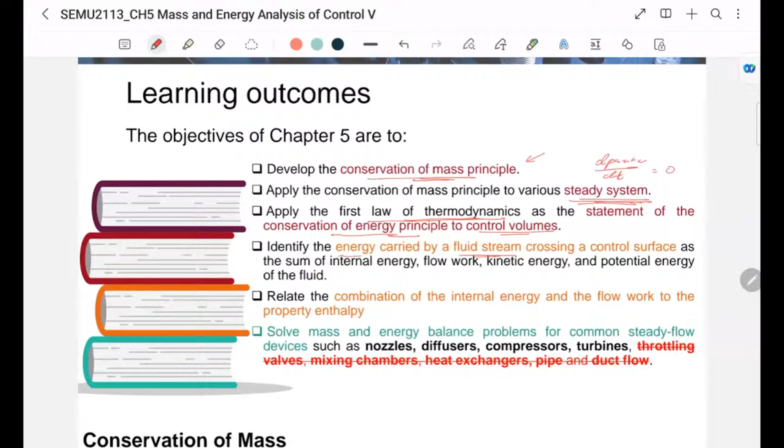And then we'll identify the energy, of course, because chapters 3, 4, 5 are all about energy. So we're looking at the energy carried by the fluid stream across the control surface. When the mass goes in, how do we define the energy carried by the fluid? When the fluid goes out, how do we define the energy brought out by the fluid itself? If you still remember the full equation that we were using in chapter 4, we basically write it as Q in minus Q out plus work in minus work out plus E mass in minus E mass out. This whole thing equals the change in the internal energy plus kinetic energy plus potential energy.

If our system is not moving, the whole control volume is not moving, there's no change in velocity, then kinetic energy is 0. If there's no change in elevation, the potential energy is also equal to 0. And in a closed system, the energy due to the mass exchange is also 0 because in a closed system there's no mass exchange. But in today's open system, this will not be 0. So we need to know how to define the energy carried by the mass of the fluid itself. So that's what it means by the energy carried by the fluid.

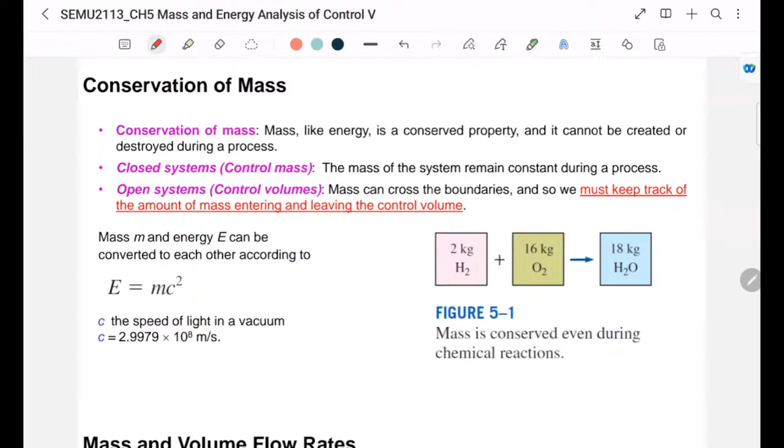Okay, so first of all, let's look at the conservation of mass. Conservation of mass is quite simple to understand. Let's look at this example here. When you have 2 kg of hydrogen plus 16 kg of oxygen, at the end of the day, when the two mix together, you get H2O. So eventually you get 18 kilograms. So the mass is always conserved.

You can't destroy the mass. If it's in your control volume, it's there. You take it out, then it must become less. If you add more in, it becomes more. Okay, so the mass is always balanced. In a way, it's almost like the equilibrium chemical equation that you write in your chemistry class. So the mass is always conserved.

Okay, and mass and energy, as some of you probably know, are interchangeable according to this equation here. We won't go into too much detail, but because they behave similarly, they can convert into one another. So therefore, when energy is conserved, mass must be conserved as well. It's as simple as that. Otherwise, where would the mass have gone, right?

And in the closed system, as we said earlier, we call it the control mass system, basically. The mass in the system remains constant throughout the process. But for an open system, only the volume is controlled, only the volume is constant. Mass is not, because mass can come in and out. So we must always keep track of the amount of mass entering and leaving the volume.

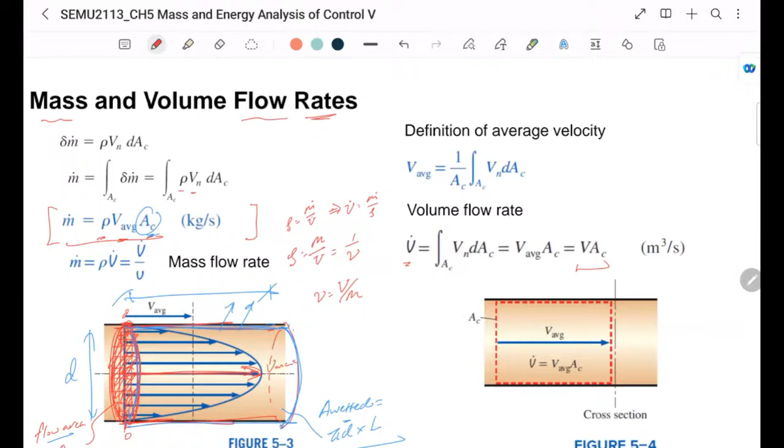So volume flow rate is basically how fast this volume of air is moving inside the pipe. It's in meter cubed per second, while mass flow rate is in kilogram per second. So that's how we calculate the mass flow rate and the volume flow rate.

But if you open the drain, this will not be 0. If they are equal, which means you add the water as fast as the water flows out, then the water level will stay constant. But if you close the water and only open the drain, then the water level will decrease. So that's what conservation of mass basically means.

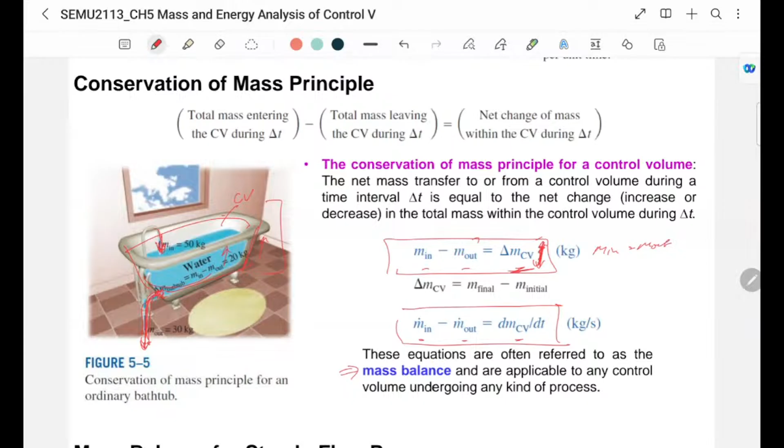Then we talk about the steady flow process or steady flow system. Steady flow basically means d of the parameter over dt equals 0, and the parameter can be any parameter. In this case, it can be the mass, which means for a steady flow system, dm control volume over dt must be equal to 0.

That's how we define a steady flow system. dP over dt must be 0, no pressure change. dT over dt must be 0 as well. In fact, dE over dt must be 0 as well. So there's no change in the pressure, temperature, energy in the control volume, everything in the control volume. No change in the mass. Only then, over time, can we call it a steady flow system.

The example just now, if you close the drain, you don't let the flow go out, there is a delta m in the control volume over time. So therefore, that is not a steady system. If you close the water tap and open the drain, there is also a dm in the control volume over time. So therefore, it's not a steady system as well.

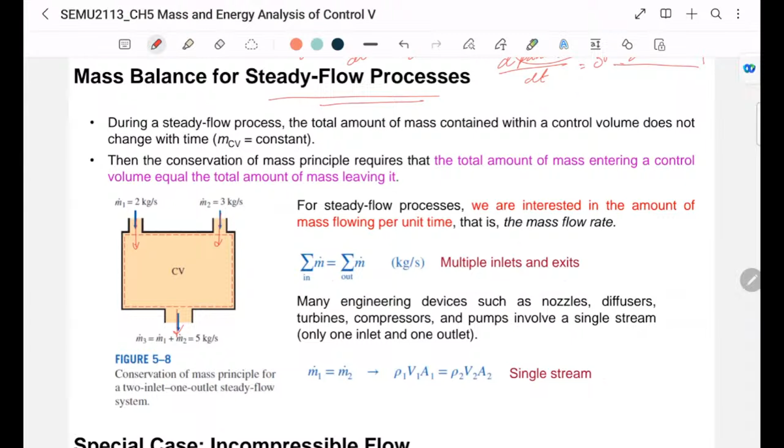So in a steady flow system, for instance, if here goes in 2 kilograms per second, here 3 kilograms per second, then the one going out must be the sum of them, which is 5. Only then can dm_CV over dt be equal to 0. So in this kind of system, if it's a single stream, one in, one out, m-dot 1, the mass flow rate coming in, equals m-dot 2. If we write 1 for this, then m1 plus m2 equals m3. This is conservation of mass for this system.

And individually, m-dot 1 equals rho V A at inlet number 1. Sorry, I have to draw this system like this. So this is m-dot 1, this is m-dot 2. The mass flow here is rho 1, A1, V1. Here will be rho 2, A2, V2. So if it's a steady flow system, then these must be equal, because then dm over dt in the control volume is 0. For multiple inlets and exits, the sum of all the inlets equals the sum of all the outlets. If there's a fourth one here going out, then you must add m4.

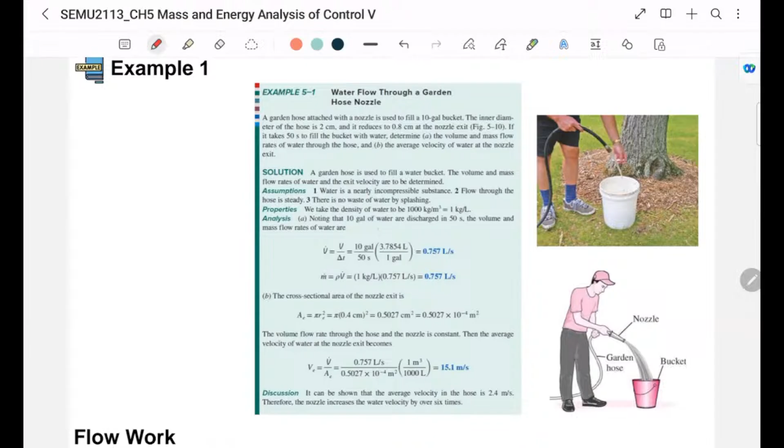So let's look at one example. It says that a garden hose is attached to a nozzle. I think everyone has played with this before. We use it to fill a 10-gallon bucket. The inner diameter of the hose is 2 centimeters, and it reduces to 0.8 centimeters at the nozzle exit. If it takes 50 seconds to fill the bucket with water, determine two things. One is the volume and mass flow rate of the water through the hose itself, not the nozzle. And second, the average velocity of water at the nozzle exit.

Okay, so to put it simple, you can imagine like this. This is a nozzle. Okay, so this here diameter is 2 cm, and here the outlet D2 is 0.8 cm.

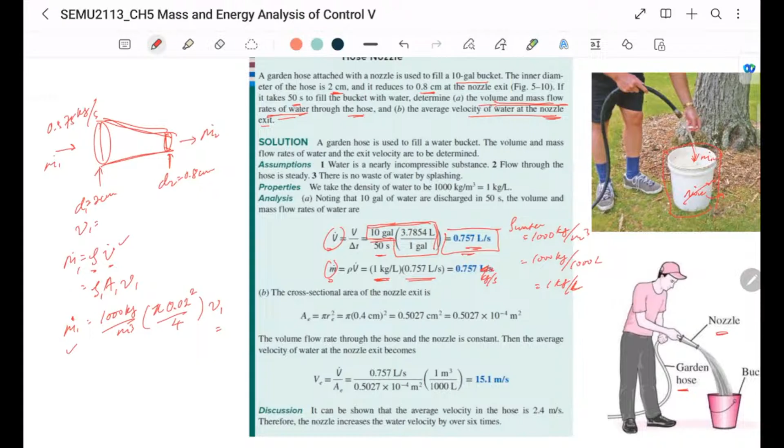There is no mass out. So the bucket itself, if our control volume is the bucket, then it's not a constant, it's not a steady system. Okay, but for the hose, yes. Mass in equal to mass out.

We look at across the nozzle, which is what I'm drawing here. Okay, so this is the dm control volume over dt is 0. The water from the hose come in, it goes out from the nozzle right away. Okay, so which means M1 equal to M2, M dot, same thing.

Okay, now we're talking about the rate. So then M2 is equal to rho 2 A2 V2. Density remain the same. Area, now pi, the diameter for the nozzle is 0.8 centimeter, so therefore 0.008 square over 4, times V2. Okay, so then you'll be able to find out how much is V2, which should be this.

So really when you analyze a system, it's quite important for you to look at where is your control volume, where is the boundary that you are analyzing. Okay, so here the focus is actually the nozzle. Okay, if we are looking at the bucket itself,

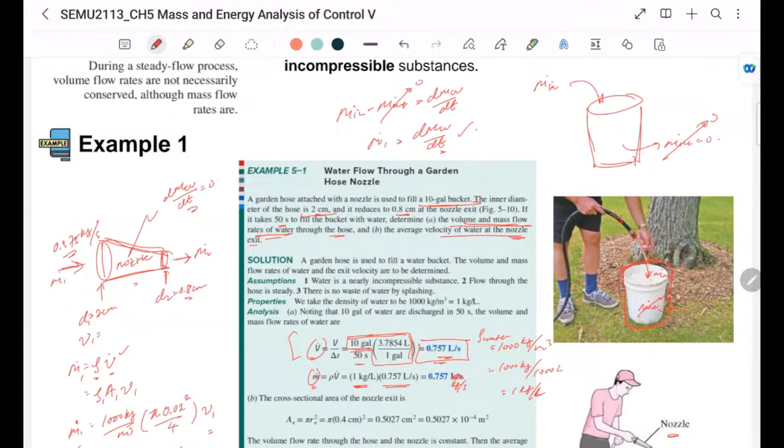Okay, so for the tank itself, it's not a steady system. There is a change in the mass. Okay, but across the nozzle, there's none. Okay, so that's what this example is trying to show you.

Okay, so far, can you understand this example? Okay, good. Right then, so let's look at the work from the flow.

Okay, so now we know how to find the flow rate, how to apply the conservation of mass. So next, let's look at how we evaluate the energy, the work done by the flow. Okay, so it's just flow moving. So how come there's any work?

There's a question asking, is 1 gallon equal to 3.78541 liters a fixed number? Yes, that's an imperial unit to SI unit conversion, and it's fixed. It's like 1 inch to centimeter.

But don't worry, all your questions in the test, in your assignment, everything will be in SI unit. You don't have to remember imperial unit conversion, and it shouldn't appear. Our syllabus is all SI unit. It just happened that this textbook uses imperial unit.

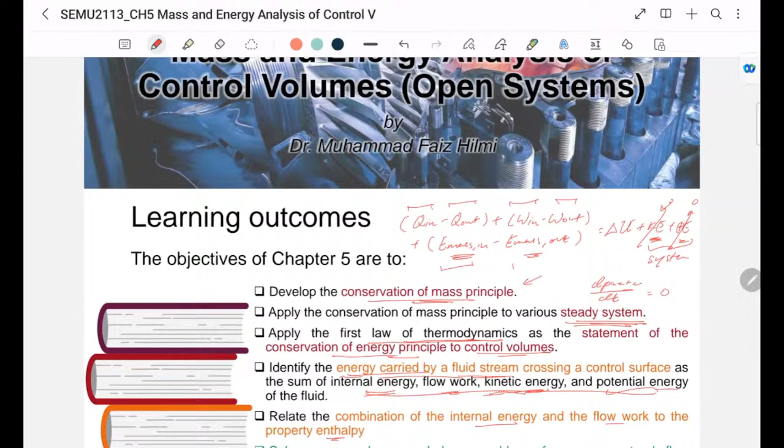It's always in minus out, in minus out. Same goes here, in minus out as well. Okay, so that's basically what flow work is, or flow energy, sometimes we call it.

Okay, but this energy is really in terms of work, because it doesn't involve a change in temperature. It's not heat for sure, so therefore it's a work.

But that is not the total energy of a flowing fluid. The total energy in the flowing fluid, we call it E.

Total energy is equal to the internal energy of the fluid itself, plus kinetic energy—U is internal energy—plus kinetic energy of the fluid, plus potential energy of the fluid. The fluid is moving.

Okay, not the system kinetic energy—the system is stationary, the control volume is stationary. It's not moving, and it's not changing elevation as well. Now we're talking about just the fluid itself.

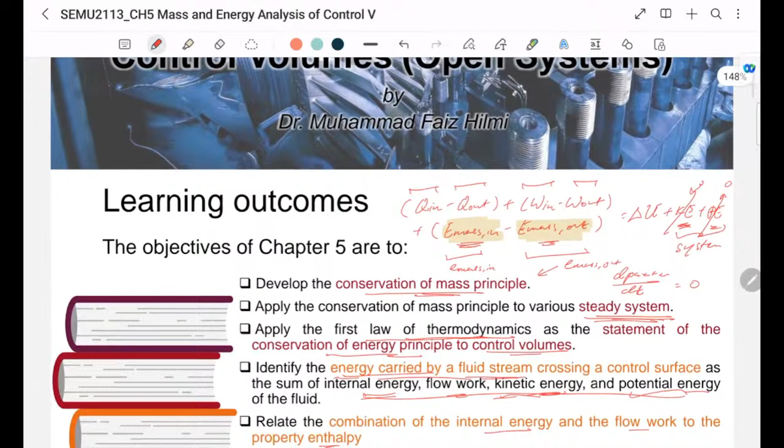Which E? Let's go back to here—this E and this E. Of course here is the absolute term. What we see just now is the E mass in, this is E mass out. Over mass, it becomes the small capital.

So then if we look at non-flowing system, which is closed system, and flowing system—for flowing system, theta equal to PV plus U plus KE plus potential energy, so then we make it into this. Whereas for non-flowing system, which is closed system, PV plus U plus KE plus PE.

PV is 0 because for non-moving flow, there is no flow work at all. So then it becomes U plus kinetic energy plus potential energy. So for non-flowing fluid, we definitely write as E, but just to differentiate it, here we write as theta.

But it's literally the E basically—it's really the same E that we're talking about, which is what you can see here. The E mass is really m multiplied with theta. If we multiply with m dot, which is the flow rate, mass is just kg. If we're talking about kg per second, which means time comes into picture, then we get the E dot mass.

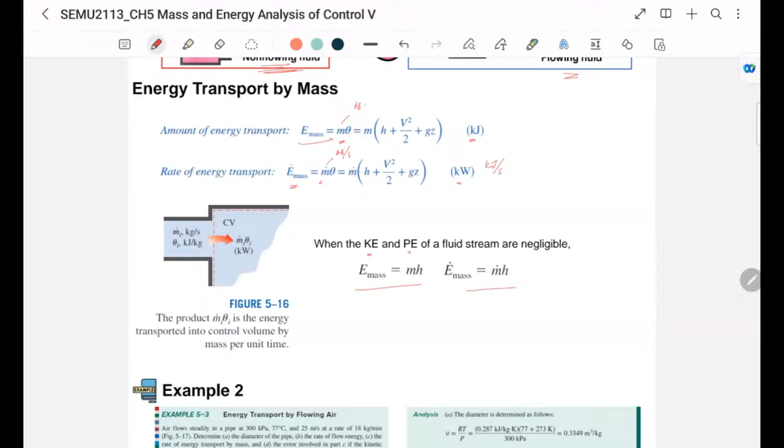And this is applicable to both ideal and non-ideal gas, which means for all the pure substances that we're talking about. Because it's applied to pure substance, to get the H we have to refer to the property table.

Unless if it's ideal gas, then we can use the ideal gas equation—that's a special case. Otherwise, all the time we have to refer to the property table to get the property, the enthalpy, basically.

Okay, so let's look at one example then—another example concerning this. It says that air flows steadily in a pipe at this pressure, this temperature, this velocity: 300 kilopascal, 77 degrees Celsius, and 25 meter per second. Maybe I should just write it properly.

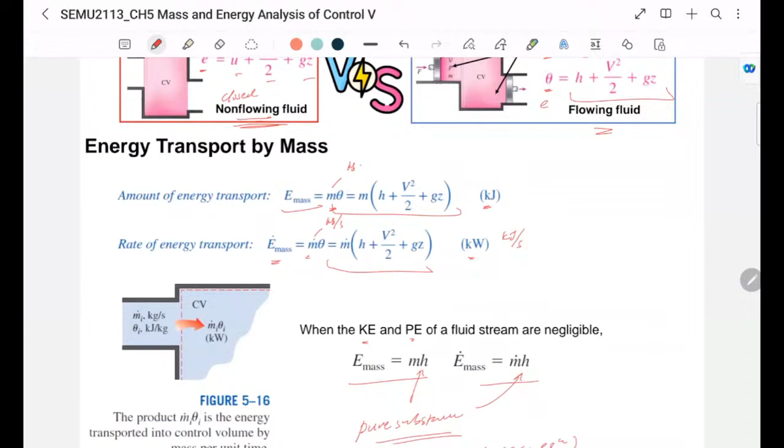Okay. And then last, the error involved in part C, which is this one, if kinetic energy is being neglected. Okay, because we know this E dot should be equal to this full equation. Okay, so it should be M dot times H plus V squared over 2 plus gZ. Okay, but part D wants us to ignore this. Then see what will happen.

Okay, so one by one, let's start by finding the area. Okay. So the solution is here as well. Okay, but I myself probably will do it slightly different. Okay, so for me, M1 equal to 18 kilogram per minute over 60, kilogram per second. Okay, I always like to change to SI unit first, so I don't get confused.

Okay, so this equal to rho 1 A1 V1. Okay, and this is air. Okay, so because air is ideal gas, the density I can calculate for state 1 as P over RT. Okay, because for ideal gas, PV equal to MRT. Okay, so then mass over volume is P over RT, basically. It's ideal gas. It's air. Okay, that's very important. You have to know what is your working fluid, and then what kind of assumption you can apply to it. Okay.

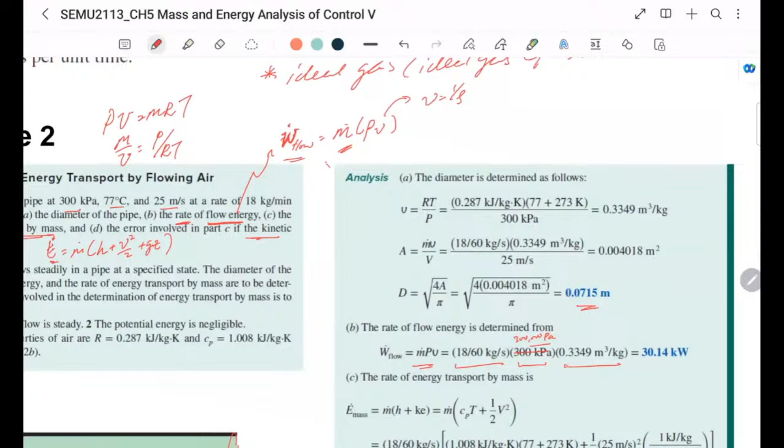Okay. Second is the flow energy. Okay, so for flow, we know that is basically m dot multiplied with Pv. Okay, because of this equation. Okay, so then you can see here the solution, m multiplied with P over density, which you already calculated just now. Okay, so from there you'll be able to find out the rate of the flow energy. Okay, so that's how we find out the flow energy.

And last is the total energy transport by the mass. So then we write the full equation here. Okay, of course there's a plus PE as well, but then potential energy, since there's no change in the elevation in the flow, is basically 0. Okay, and then here the enthalpy, instead of looking from thermodynamic table, because it's ideal gas,

H can be approximated to Cp multiplied with T. Cp is the constant pressure specific heat. T is the temperature. So then if you calculate everything, you should get this number. So that is the total energy transport by the mass. Okay. Flow energy plus internal energy plus potential energy plus kinetic energy. Okay. Internal energy plus the flow energy, of course, equal to the enthalpy. So that's how we evaluate it.

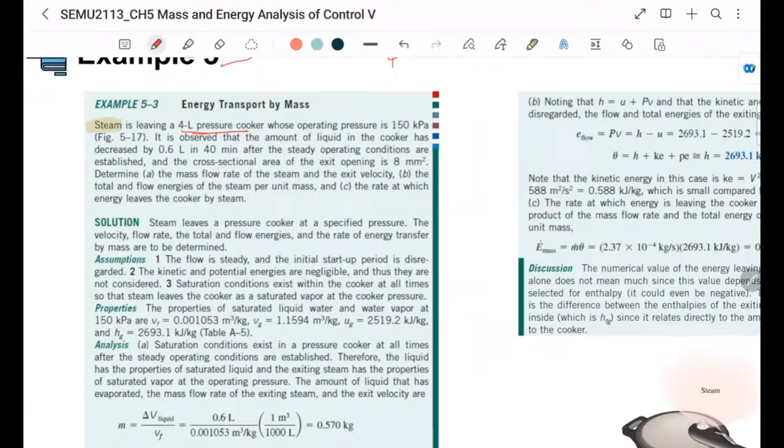Okay. So here it says that steam is leaving a 4-liter pressure cooker. Operating pressure 150 kilopascal, which means inside here is 150 kilopascal. It is observed that the amount of liquid in the cooker has decreased by 0.6 liter in 40 minutes. So then that gives us the volume flow rate basically, after the steady operating conditions are established. So this is under steady state condition. So then the volume flow rate is 0.6 liter over 40 minutes.

And the cross-section area of the opening is 8 millimeter square, so cross-section area is available. So what is the mass flow rate of the steam and the exit velocity? That's what the question wants us to find out first. Second, the total and the flow energy of the steam per unit mass. Which means the question wants us to find out the E and the flow energy, which is the W flow. Total energy I'll just write as E, or earlier they write as theta.

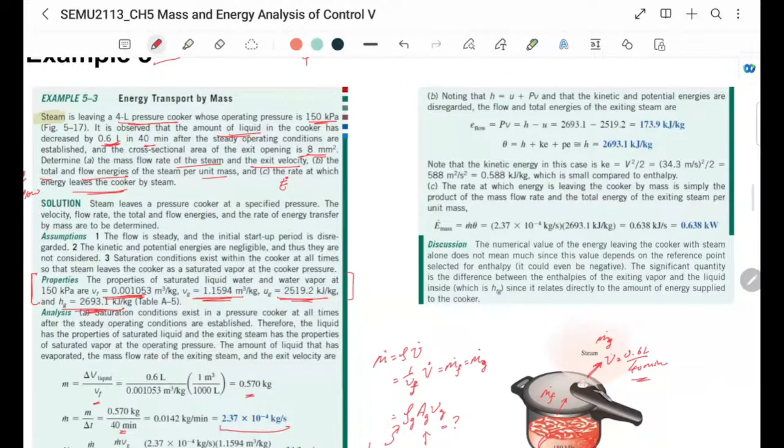Then is the total and the flow energy. Maybe let's find the flow energy first. Oops, it's not written here. So the flow energy is actually equal to PV. And we also know that H equals the flow energy plus internal energy U. So to get this, it's basically H minus U. And the one that goes out is the gas, so we use the property of the gas. From the thermodynamic table, we have Hg and Ug, the saturated vapor, which gives us this.

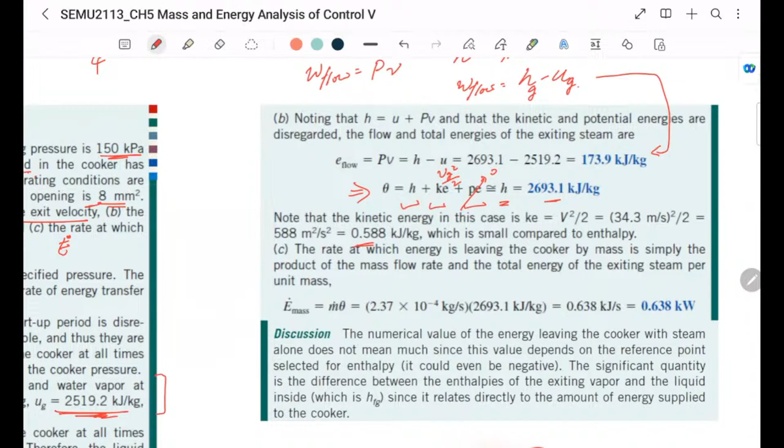And then the total energy, theta, is defined as H plus kinetic energy plus potential energy. Kinetic energy is close to zero, as we know, so we can approximate it equal to H. Potential energy is definitely zero. Or we can include kinetic energy as well, it's not a problem, we already have this. So this can be V squared over 2, and you get an additional 0.588 to this. For me, I will just include that, since it's always enthalpy plus kinetic energy plus potential energy.

And then the rate at which energy leaves the steam cooker is basically this theta multiplied by the flow rate that we calculated earlier. Then we get the actual kilowatts of energy, the rate of energy leaving this pressure cooker through the steam. So that's how we can solve the question. It's all about finding the state, basically.

How do we find the state? Then we'll be able to calculate the parameter. Okay. Right then. Any question up until this point? Is everyone still following me?

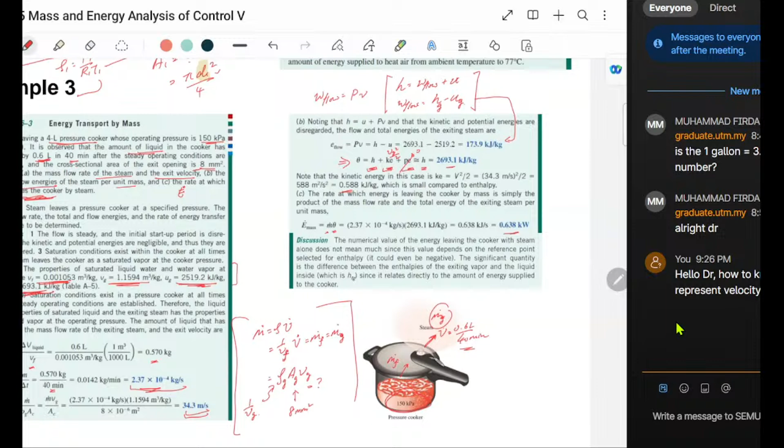How to know V represents velocity or volume? That's a very good question. I would say, yep, I think throughout the notes here, if it's velocity it is this writing of V, okay? Whereas for volume it is this, yes, this curvy V.

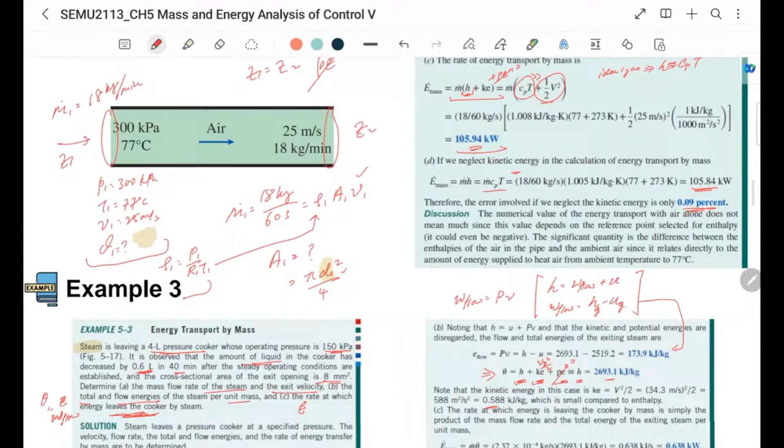So this is volume, this is velocity. Yes, it's a bit difficult to differentiate, I agree. And there is no specific velocity. There's nothing so-called specific velocity. So therefore, you don't have a small cap velocity. So all these curvy V are standing for volume, specific volume. The small cap curvy V, specific volume.

The large curvy V is the total volume, without the serif. It's the sans serif font. Is that okay? Well, a lot of time in thermodynamics especially, we're running out of symbols to represent things. Sometimes we do use U to represent velocity as well, but in this case we can't because internal energy is using U already.

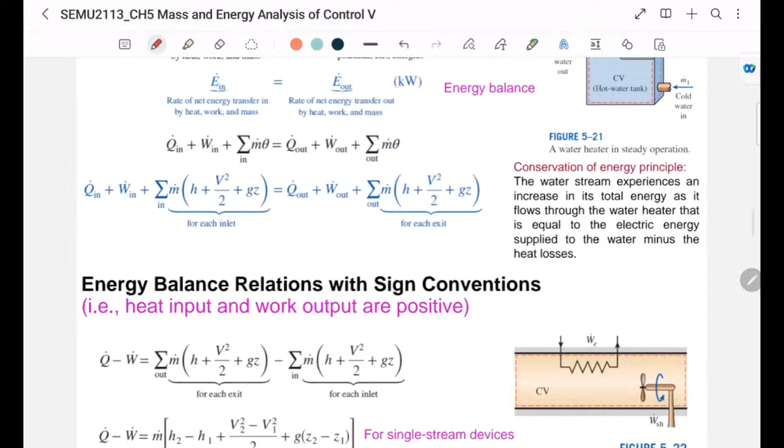So yeah, the volume is the curvy sans serif V, whereas the velocity is a serif V, the straight V. Okay. Right then. So let's look at how we analyze steady flow systems then. Steady flow open system.

So we looked at how we define energy already. The work, the flow energy, the flow work basically, and then the total energy in the flowing fluid. So we looked at conservation of mass and how we define the energy of it. So then let's apply that to a steady flow system. In a steady flow system, basically volume is constant, mass is constant, energy is also constant. So conservation of energy and conservation of mass have to be applied.

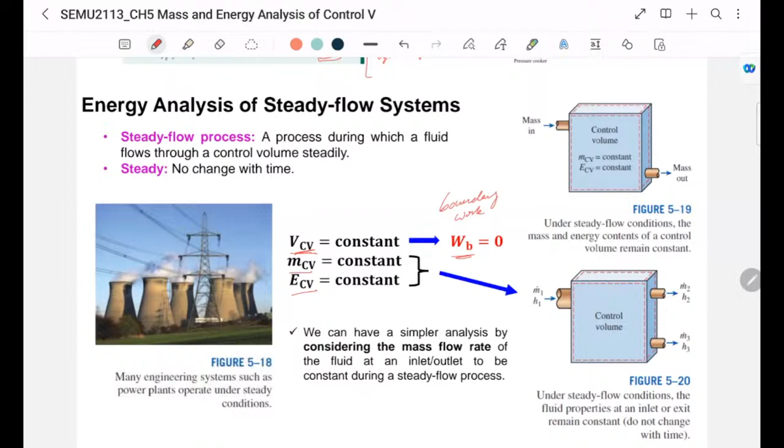And the fact that volume is constant means that boundary work is also zero. Boundary work is the expansion of the boundary, the work done by the boundary itself. Since now the boundary doesn't expand, volume is constant, so boundary work will be zero, unlike the closed system that we learned before. So here there's no boundary work, but then we have a flow work. Steady again means no change in time basically.

So then the equation that we are applying here is pretty simple. I'll just write the E mass as E, so it's a bit shorter. Right, and then because this is the system potential energy and system kinetic energy, as long as the system is not moving and there's no elevation change, velocity 0, elevation change 0, so then we have this to be 0.

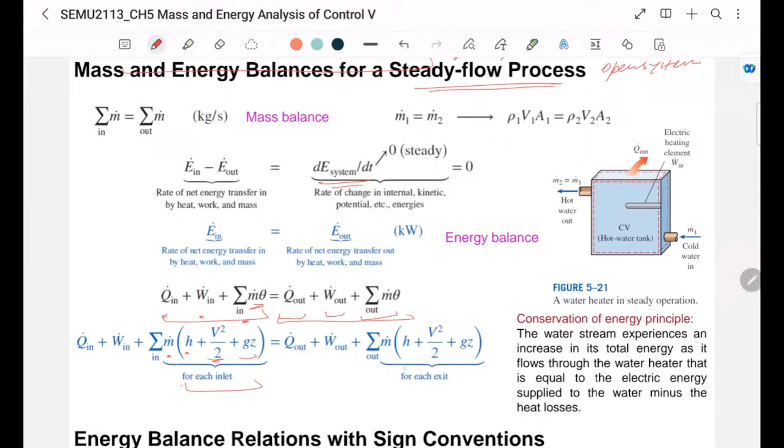Steady flow open system. This is the equation that we'll be using. And m dot theta, so m dot multiplied with enthalpy plus kinetic energy of the fluid, not the system, the fluid itself, plus the potential energy of the fluid. Same goes for this side. So this is what we were looking at just now, how to define the energy in the flow. Now we apply it here. So the whole thing is still based on the equation that you've seen in chapter 4, basically.

And sign convention, well, I think the easiest is if the work goes in, energy goes in, then it's positive. If they go out, it's negative. I think that's much easier to remember. Okay. And of course, everything can be expressed in specific terms as well. It's not a problem.

If we divide over mass flow, depending if we are talking about the rate of energy transfer, we divide it by mass flow rate, then we get the specific heat. If you're talking about the power, rate of work transfer, divide by the mass flow rate, then we'll get the specific work, basically. So this equation really can be in the absolute terms or in the specific terms.

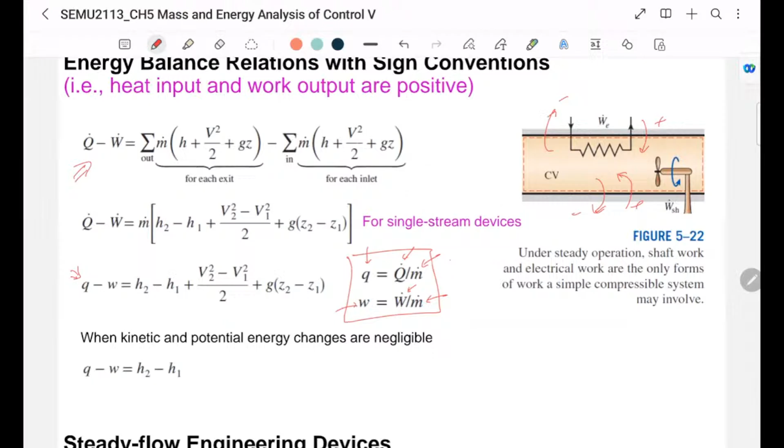So let's look at a few steady flow devices then.

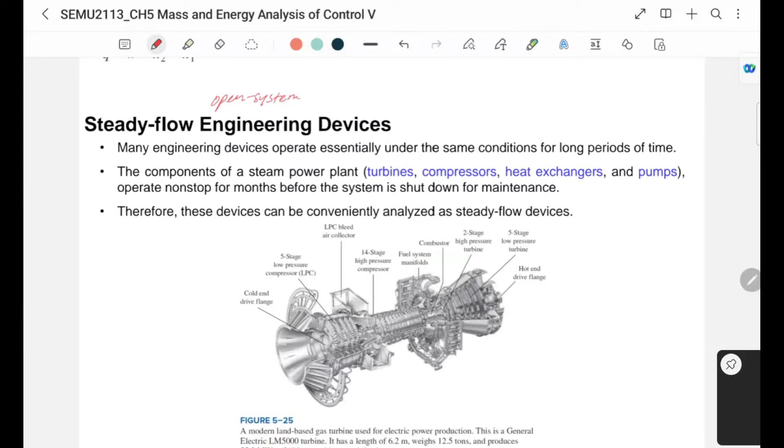So next, let's look at how we can apply what we learned just now to some of the steady flow engineering devices, open systems specifically, where there's a mass exchange. And we'll be looking at a few examples: nozzle, diffuser, turbine, and compressor. There are more examples such as heat exchanger and pump, but we won't go into every single one of them, mainly because of the time constraint. So we'll look at the general concept, and then you should be able to apply it to the rest of them.

So just remember, all these devices, all these systems, we analyze under steady flow. Which means the change of mass in the control volume over time is always zero. So in a way, there's no mass accumulation in this kind of system when we analyze them.

So first of all, nozzle and diffuser. Nozzle, we've seen the example before. It changes the velocity. Across this device, this control volume, the properties will change. Specifically, a nozzle increases the velocity. So when velocity increases, pressure drops. So sometimes when engineers need to speed up the flow, we'll use a nozzle. We change the area. This is A1. This is A2. So by changing the area, we can manipulate the velocity, we can manipulate the pressure.

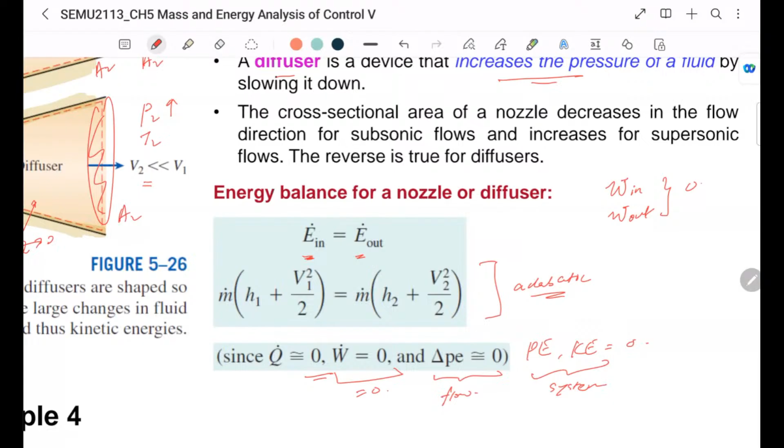This here, the small cap one, they are referring to the flow. So the change in the flow kinetic energy, there is, but then change in the potential energy in the flow is zero as well.

So quickly, let's look at one example. So this is a diffuser in the aircraft engine. So diffuser and nozzle is quite commonly used. In fact, it's being used in the aircraft engine, the same aircraft that everyone takes when we go travel.

So it says that air at 10 degrees Celsius and 80 kilopascal enters a diffuser of a jet steadily with a velocity of 200 meter per second. Inlet area. So it's a diffuser, so I should just draw like this. 10 degrees Celsius, 80 kilopascal. Velocity is 200 meter per second. The flow goes in. Inlet area 0.4 meter square.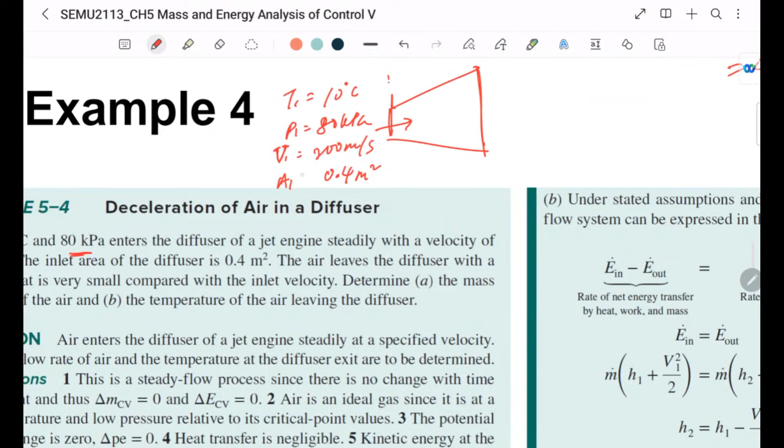I should write this properly. V1. Straight V. And then A1. The air leaves the diffuser with a velocity that is very small compared to the inlet velocity. So going out here, V2 is almost zero. That's what the question says. So determine the mass flow rate of the air and the temperature of the air leaving the diffuser.

So the mass flow rate we can analyze from the inlet because the inlet has most of the properties that we need. It's rho 1, A1, V1. V1 we know, A1 we know. Rho is basically P1 over RT because this is air. It's an ideal gas, so therefore we can apply the ideal gas equation for it. So that's how we can find out the mass flow rate at the inlet of the diffuser. And this is our control boundary, by the way.

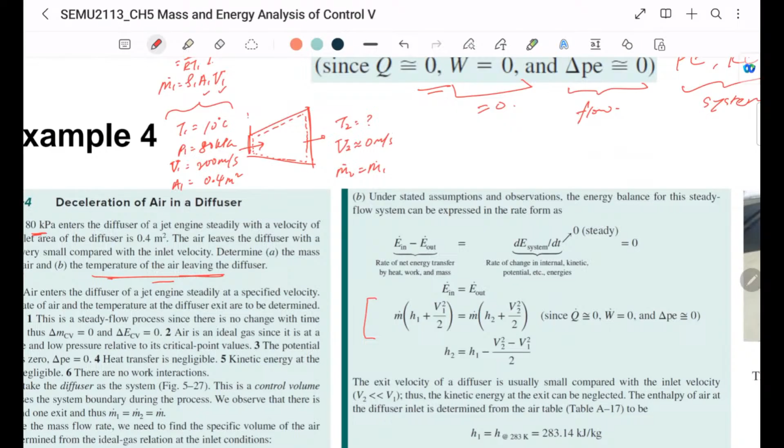Then how can we find out the temperature leaving the diffuser? This is a steady flow device, so therefore M2 has to be equal to M1. And then we have to write the energy equation, which looks like this. And here, there is no heat transfer involved, not being mentioned. For a diffuser, definitely the work transfer is 0 as well. So therefore, we come to this equation here.

So H1 we can calculate based on CP T1. And H2, obviously, we can calculate based on CP T2, which T2 we don't know, T1 we know. Velocity 1 we know. Velocity 2, the question says is very small, almost 0, so we can treat it as 0. So we rearrange the whole thing. Here, the mass got cancelled out. Even if it doesn't cancel out, you know the number, so we can just plug it in. So then eventually, you will get T2, which is about this temperature.

So that's how we can solve a problem for a diffuser. If it's a nozzle, pretty much the same way as well. So you can see the pattern is always you find out the state at one side first, and then you relate the second state using the energy balance equation. Most of the time, that's how we solve an open system. Even the closed system, pretty much the same method as well. That's how we solve thermodynamics problems in general. We find out the one state first, because from state 1 to state 2, in between, this is the process.

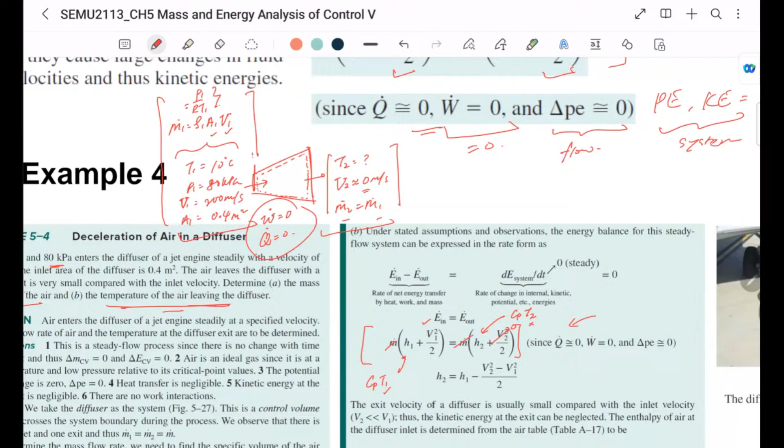Here is an example of a nozzle. So here is steam. Steam means that we have to find the properties using the steam table, thermodynamic table. We cannot apply the ideal gas equation here anymore. So here as well, steam at this pressure, this temperature, steadily enters a nozzle whose inlet area is this much. So now this is a nozzle, so I'll draw it in a nozzle way.

So P1 is 1.8 megapascal. T1 is 400 degrees Celsius. Area 0.02 meter square. The mass flow rate is 5 kilogram per second, so M1 is 5 kilogram per second. The steam leaves the nozzle at 1.4 megapascal, so P2 is 1.4 megapascal. Velocity 275 meter per second.

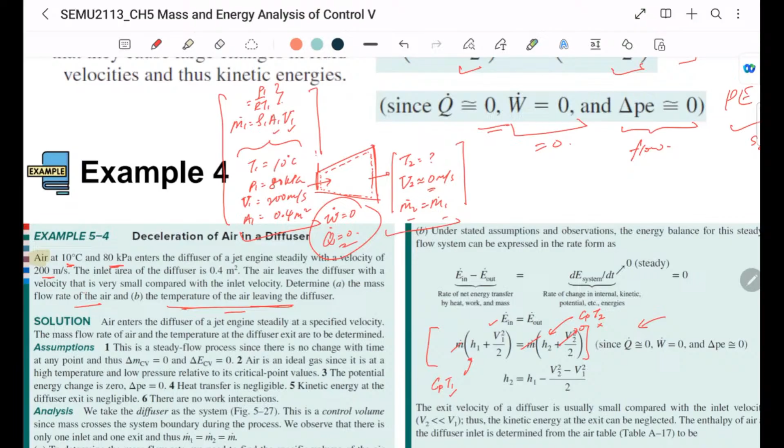So here there's a heat loss from the nozzle per unit mass of this much. So then there is a Q out, which is 2.8 kilojoule per kg. The one earlier is adiabatic because Q is 0. It basically means it's insulated. But here, not for this nozzle. There's a heat loss, basically.

So A, determine the inlet velocity. B, exit temperature of the steam. So more or less like earlier. So to find out the velocity, here we can use this equation still.

The difference here is density. We cannot use P over RT because this is ideal gas equation, and it's wrong to apply it here. This is steam, not ideal gas anymore.

So for density here, we have to use 1 over specific volume. First we need to find out the state of the steam. We have this pressure and this temperature.

If we look at the thermodynamic table, you will find out the specific volume and specific enthalpy. In fact, if you look at this pressure and temperature combination, you'll find out the steam should be superheated. So at this pressure and temperature, this is the specific volume, this is the enthalpy.

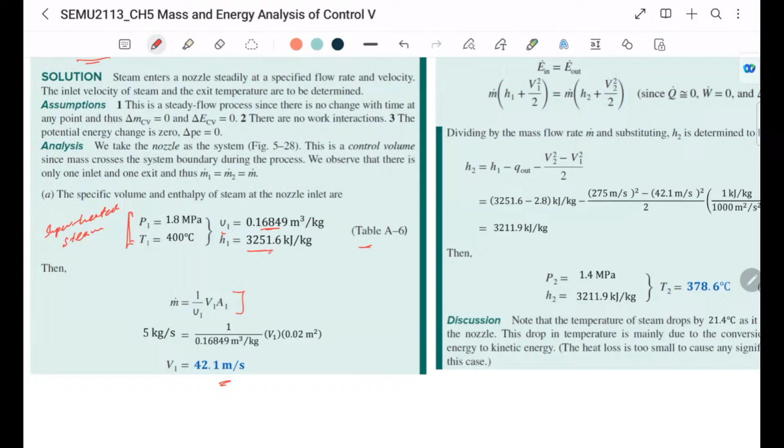I'll go through quite quickly because there are still quite a few examples we have to cover, so I'll just roughly explain the steps and you try yourself later. It's good to try as well because this can be how the test question will look like. So once you find out state 1...

...then we write the energy balance. We should be able to find out the second state, T2. Then we apply the equation. The full equation again is Q in minus Q out

plus work in, work transfer out, plus change in system energy, all equal to 0, because change of internal energy, change of system kinetic energy, and change in system potential energy are all 0. Here there's a Q out, no Q in, and no work transfer because this is a nozzle. So it gets reduced to this if we express it in specific terms.

So then you plug in the numbers. You should be able to find out that the enthalpy at the outlet is how much.

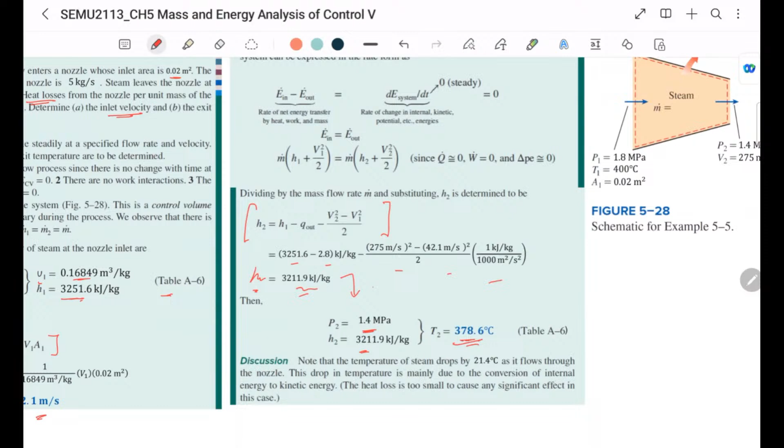Again, this is steam. Steam is not an ideal gas, so we can't apply the ideal gas equation—just remember that very well. If it's not ideal gas, we cannot apply the ideal gas equation; we must refer to the property table. So that's what a nozzle and diffuser is: it changes the flow property, but there is no work transfer in the process.

Next, turbine and compressor. Unlike nozzle and diffuser, turbine and compressor are meant for work transfer. In fact, turbine is used to transfer the work out—work is done by the turbine, so from the flow, we transfer the work; the flow does the work and there is work out for sure from the turbine. For compressor, we give work in for it to do work to the flow.

Compressor brings the flow to higher pressure or higher flow rate. Turbine, quite the opposite, is driven by the pressure—from the pressure the flow develops, and therefore it delivers the work transfer. So they are opposite as well.

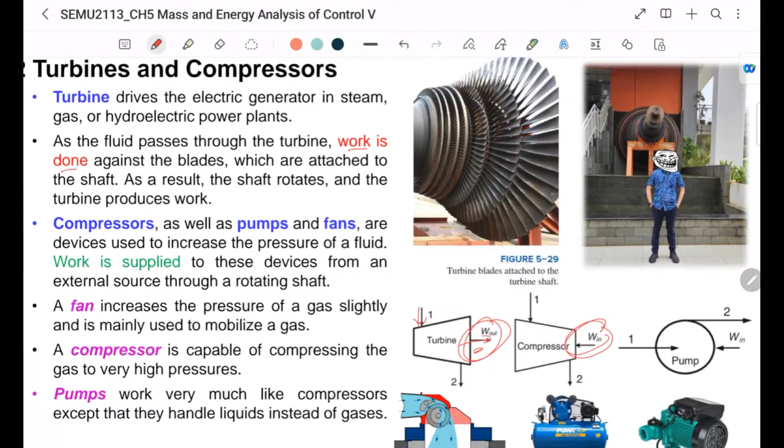One gives work to do work to the flow, and the turbine is exactly the opposite—the flow does the work, transferring the work out from the turbine. And how this is normally drawn is not correct; I don't agree with this. For turbine...

...we draw it like this: this is 1, this is 2. And P1, P2—P1 is always larger than P2. Mass has to be conserved, because it's still a steady system.

For compressor, sorry—here there's a work out. Whether or not there's a Q in or Q out depends on whether the turbine is adiabatic or not; there can be heat transfer in the process.

For compressor—this is turbine, this is compressor. For compressor, usually we draw this side small, this side large; you can draw it from the top too, no problem, but the direction is opposite. Usually the small side is the lower pressure—here P2 is larger than P1, opposite to the turbine. And for compressor, there's work in, and there can be heat transfer in or out as well, depending on whether the compressor is adiabatic or not.

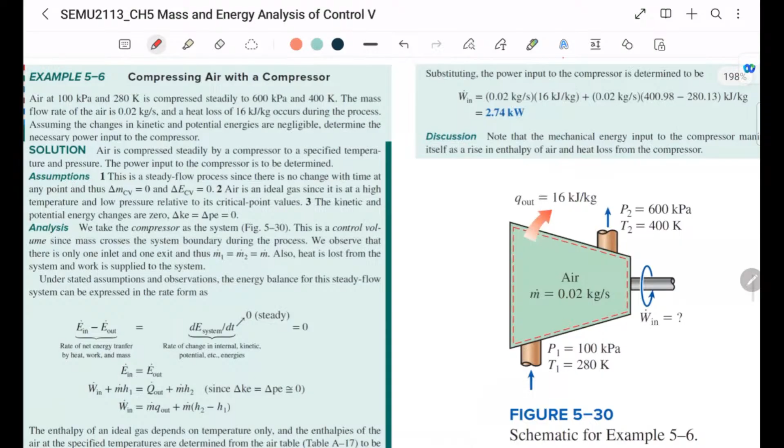Okay, now let's look at one example then. So this is compressing air with a compressor. Air at 100 kilopascal, 280 Kelvin, is compressed steadily.

Whenever the question says steadily, it means steady state, basically, steady flow, to this pressure, this temperature. Well, this diagram, again, the way they draw is not correct already, so let me just redraw it.

It should be like this. This is going in, so P1 is 100 kilopascal, T1 is 280 Kelvin. And going out is P2, 600 kilopascal, T2, 400 Kelvin. And the heat loss is 16 kilojoule per kg.

In fact, this diagram, what is wrong is just it needs to be this way around, but doesn't matter. Let's complete this, so we have Q out. Sometimes the question may ask you to draw diagram like this, so do try to draw the schematic diagram whenever you solve the problem.

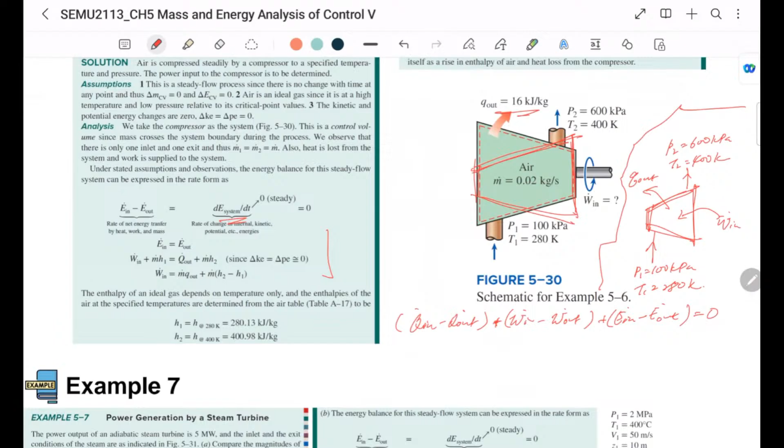No changes in the system internal energy, kinetic energy, and potential energy, so therefore 0, no change in the E over T, it's a steady system. And then here, there is no work out, there's a work in. There's a Q out, there's no Q in.

And then we need to find out this, so then we just need to rearrange. So just rearrange the equation. And then Q out is basically the rate of heat transfer.

Here, the question gives us in specific term, so therefore we have to multiply with the mass, we'll get this Q dot out, plus M dot, because this is...

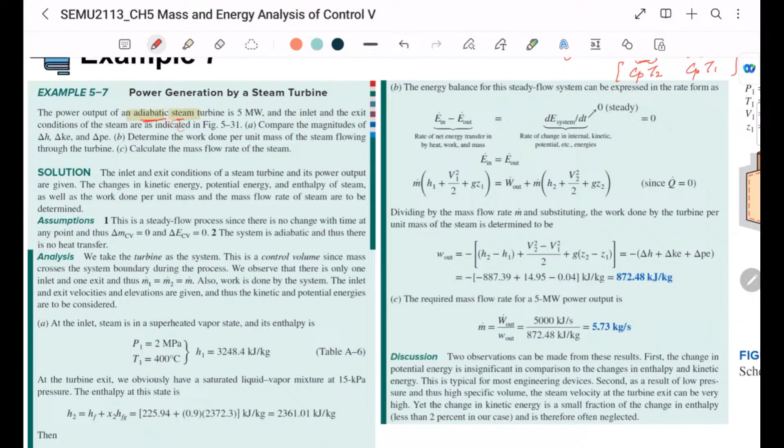And the inlet and exit condition of the steam are indicated in this figure, inlet, exit. Again here is drawn wrongly, let me just, yes, it should be this way.

And yes, I'm quite particular about this direction because this is how usually we draw turbine. And it's an adiabatic turbine, so therefore it's fully insulated, so Q equal to 0. But there is a work out, which is 5 megawatts, so this number is given already. Question wants us to compare the magnitude of delta H, delta KE, and delta PE.

Determine the work done per unit mass of the steam flowing through the turbine, which means this is the E, or the theta. And then calculate the mass flow rate of the steam.

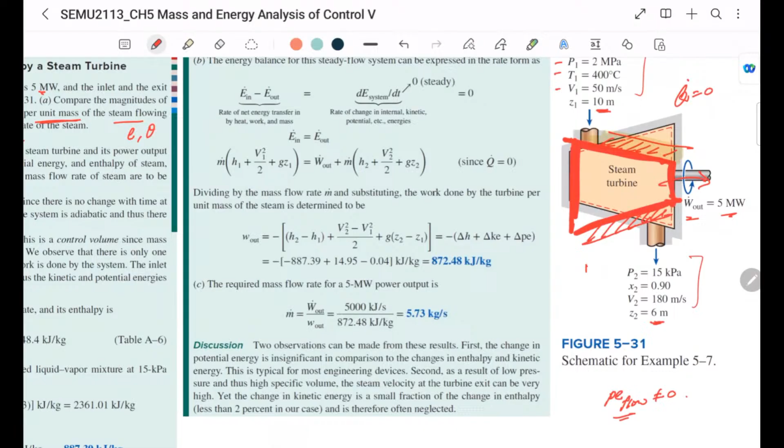So the first thing to do here, since we have pressure, temperature, velocity, you can see there is an altitude. In this example, altitude is changing, so the potential energy for the flow is not zero. Whenever there's a change in elevation in the flow, you cannot assume this as zero. The potential energy for the system is still zero because the turbine doesn't move to a higher or lower altitude, but the flow does.

Because this is steam, based on this state 1 condition, we look at the saturated steam table. At this pressure, this temperature, you most likely find out that it's a superheated vapor, already beyond the saturated vapor line. So based on the superheated table, you should be able to find out H1.

For H2, notice the question says there is an X equal to 0.9. This is the quality of the mixture, 0.9, which means 90% is vapor, 10% is liquid. So at this pressure, you have to look for the state H2 based on this equation at this pressure, just like how we learned in chapter 2 before this.

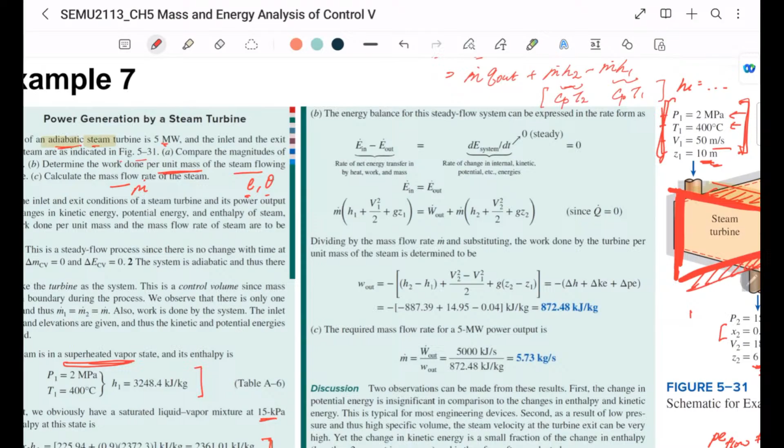Then the rest of it, to find out the flow energy, we just follow pretty much the standard step: write the energy equation, then you should be able to find out the work because of the flow itself. They write it as W here, but really it should be written as E or theta - it's the change in enthalpy, change in kinetic energy, change in potential energy of the flow.

This equation here, and then the mass flow rate is the total amount of work transfer out over this one - this is the theta or the E, the one written earlier. Somehow this textbook mixes up the symbols, which is quite confusing, but they're using E and theta earlier, so this should be E and theta - that's what they're referring to.

The way I see it, the step for the solution is more or less the same - it's just how we find out the property of the first state, and then how we relate to the second state. That's pretty much the example for nozzle, diffuser, compressor and turbine. There are a few more examples at the back here which I won't go into because they are more or less the same as we saw earlier.

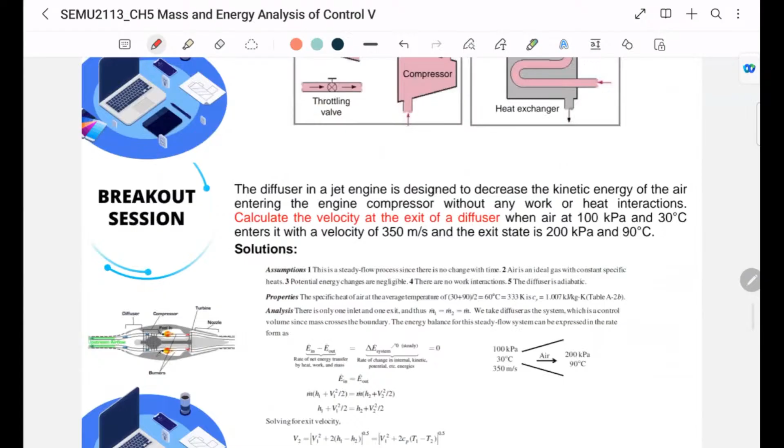So quickly, before we move into the past year question, just one more time to differentiate between all these devices. First, nozzle and diffuser: work in, work out, for sure zero. For turbine, there's work out. For compressor, there's work in. That's the difference between them.

All of them can have heat transfer in or out, unless it's being insulated. And then all of them have mass exchange as well.

So 1. Okay. Then what about throttling valve? Throttling valve is pretty much like a nozzle, because when you close it, the area becomes smaller. So mass is still conserved, and also no work transfer. But whether or not there's a heat transfer depends on whether there's insulation or not. So that's throttling valve, even though it's not part of your syllabus, but just to let you know.

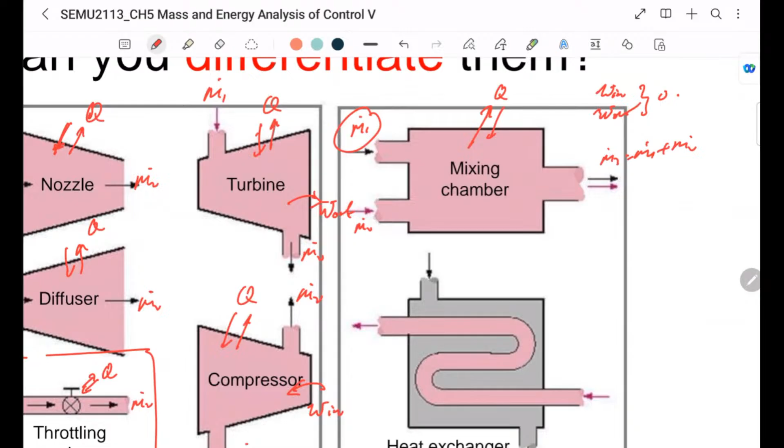Heat exchanger, well, it's slightly more complicated. So M1 equals M2, because what goes in here will flow to here. So that's steady state. But at the same time, we have two different streams. This one will go around the red tube here, so M3 equals M4. And between them there will be heat transfer. That's the purpose of this device, to transfer from 1 and 2 to 3 and 4. There is a heat transfer between the two of them.

There can be heat transfer between here and outside as well, unless, of course, it's insulated. If it's an adiabatic heat exchanger, then different story. And pretty much all the time, a heat exchanger doesn't have a work transfer as well. So really only turbine and compressor have a work transfer. The rest of them have no work transfer at all. All of them are open systems, so all of them have a mass exchange. So that's how we differentiate between all these devices.

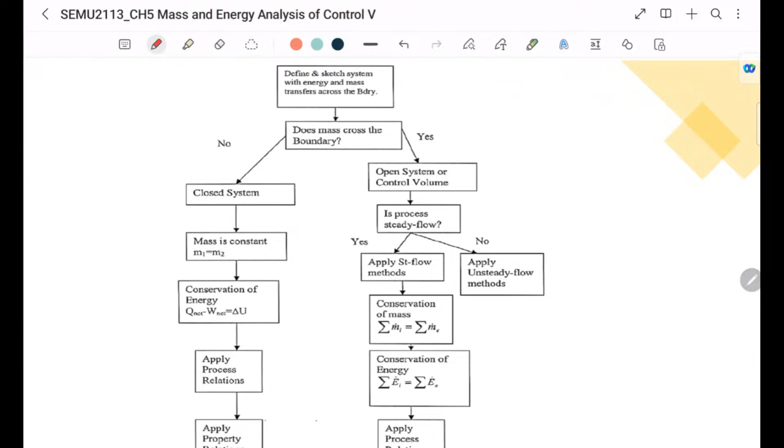And the example I'll leave you to try. But lastly, the last of the lecture slides really. Whenever you solve any thermodynamics problem, first of all, define and sketch the system with energy and mass transfer across the boundary. Like all the examples just now, the first thing I draw is the control boundary, the control volume, basically where's the system boundary that we're analyzing. And then label whether there's any work transfer, energy transfer, or mass transfer. When you draw it out, it becomes clearer.

And then whether there's mass crossing the boundary. If yes, it's an open system. If no, it's a closed system. This is what we learned in this chapter, and this is what we learned previously in chapter 4. If it's a closed system, then mass is constant, then we just apply conservation of energy and solve everything else. If it's an open system, the next thing we should ask is whether the change in mass in the control volume is equal to 0. If yes, then it's a steady flow. Then we follow conservation of mass, conservation of energy, and find correspondingly.

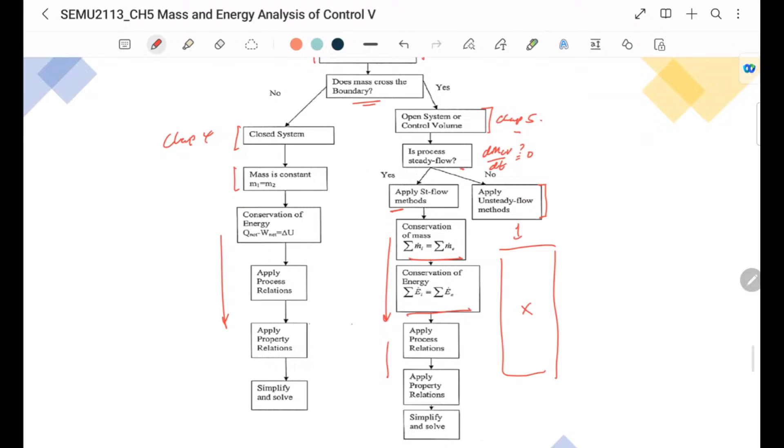Okay, right then. So any question up until this point? Is everything still clear? Is everything still understandable? Okay.

There's a question: does that mean turbine is the only work that is not equal to 0? No, compressor as well. Compressor has a work input. Only for turbine and compressor is the work not 0, because there's a work transfer. Of course, one is positive, one is negative: the compressor consumes work, so work goes in. For turbine, it extracts work, so work goes out. Only turbine and compressor, the work is not 0.

Okay, right. I hope everyone can still follow. So next, let's look at one past year question. I think we only have another 30 minutes left, so let's quickly go through one past year question. I also make this your assignment, so you can try it afterward. For the examples in the lecture note, please go through them and practice yourself, then you'll probably understand better. All the solutions are given, so it'll be quite straightforward to follow.

So in your test two, there will be 2 questions. This is a past year, 2022, 2023. It's 1 hour 30 minutes, not 45 minutes anymore. And 2 questions. First question will be on the closed system.

Second question will be on open system. As for which one is a pure substance, which one is ideal gas, it depends on the question. But as you may see in the example earlier, if it's a pure substance, non-ideal gas, then we have to refer to thermodynamics table to find out the property. If it's an ideal gas, then we can still refer to the thermodynamic table, no problem. But we can approximate using the ideal gas equation.

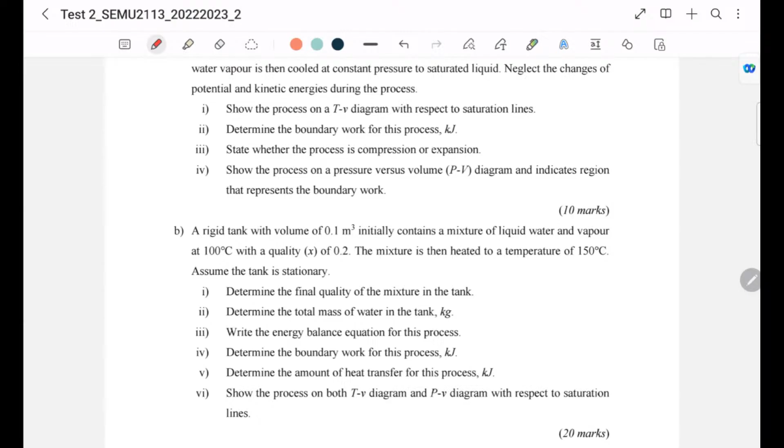Right then, again, I wouldn't do the calculation. I would just roughly go through the steps. If you can understand what we went through in the lecture, then it shouldn't be a problem for you to solve this. So here it says that 1 kg of saturated water vapor is initially stored in a piston cylinder device. So piston cylinder device is basically a closed system.

The temperature is 200 degrees Celsius. Then the water vapor is cooled at constant pressure, which means pressure is constant, to a saturated liquid. So from saturated vapor to saturated liquid. Neglect the change of the potential energy and kinetic energy during the process. First, the question wants us to show the process on the T-v diagram. Okay, I try my best to write the curvy V.

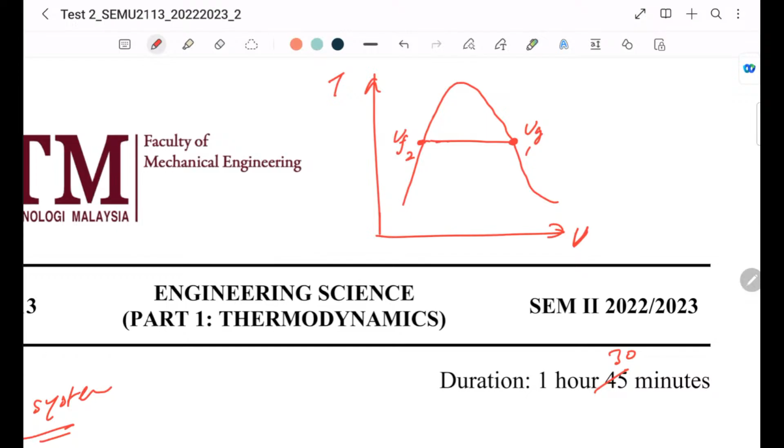So the water is cooled from saturated vapor, which is here, to saturated liquid at constant pressure. So this is 1, this is 2. So the process looks like this. And if you remember, for T-v diagram, the constant pressure line is basically this. It didn't say how much is the pressure, but that's the constant pressure line. The state changing from 1 to 2 is basically from here, 1 to 2. So that's the answer for number 1 here. It's really quite straightforward.

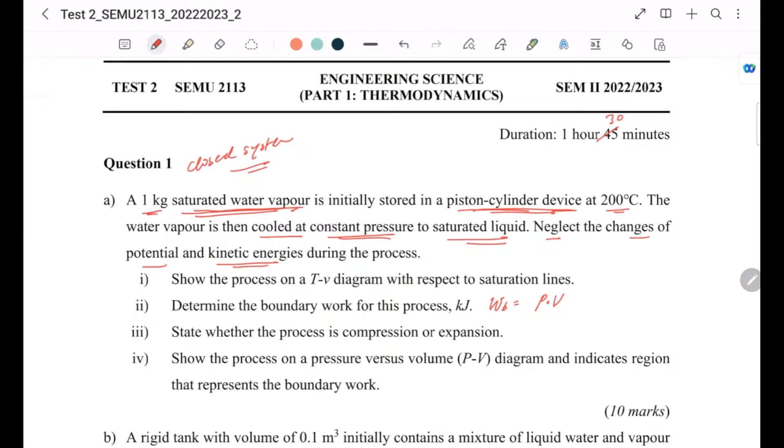Then next, determine the boundary work for the piston. So boundary work is basically pressure multiplied with volume change. But this only gives us joule per kg, so therefore we have to multiply with the mass as well. Pressure is a constant pressure, so we need to find out how much is this pressure. We know this temperature, which is 200 degrees Celsius, so we can refer to the saturated table. 200 degrees Celsius, which is here. This is by temperature increment.

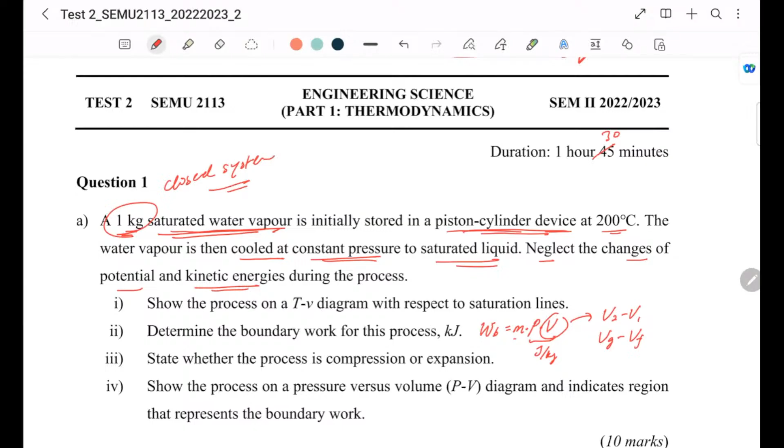Let me just use this instead. So we know the pressure, it will be the saturated pressure. And volume change is basically V2 minus V1, which is Vg minus Vf, times 1 kg. Then determine whether the process is compression or expansion. You just have to look at whether V2 is larger than V1. If it's larger, then it's expansion. If it's smaller, it's a compression. Vg should be larger than Vf, because the V for gas should be larger. This was V1, this is V2. So it's a compression for sure.

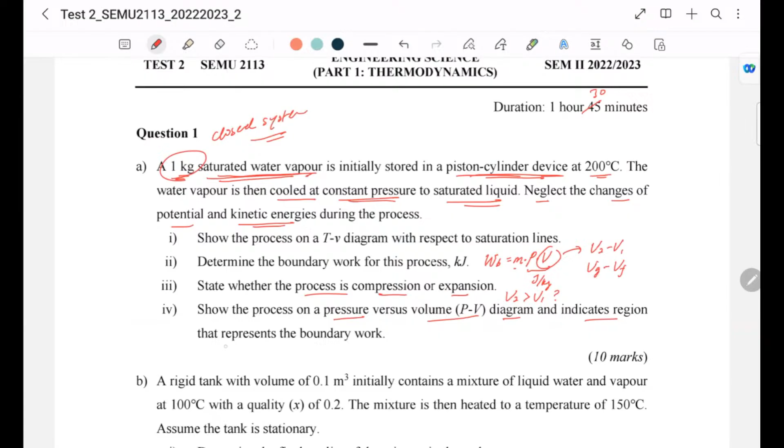And then last for this part A, show the process on a pressure versus volume diagram and indicate the region that represents the boundary work. Just now was a T-v diagram. If we draw a corresponding diagram, this is V, now it's P. The dome is still the same, but the constant temperature line now goes like this. So this is 1, this is 2. This is T equal to 200 degrees Celsius. And this is only half of the answer.

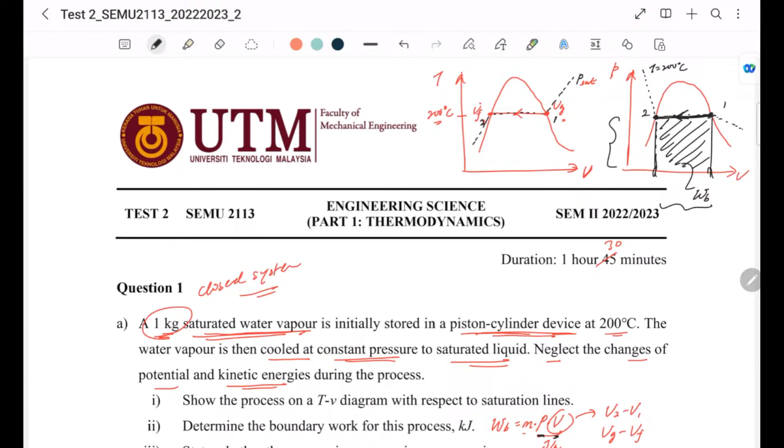The question also asks to indicate the region representing the boundary work. Boundary work is basically P multiplied with volume. So we have this pressure. So this is basically the boundary work, the area under the graph. P times volume, right? This multiplied with this. So that's how we answer the question. So that's part A. Part B.

A rigid tank with a volume this much initially contained a mixture of liquid water and vapor at 100 degrees Celsius with quality of 0.2, which means the overall volume is 0.1 meter cube, but 20% of it is vapor.

Okay. The mixture is then heated to a temperature of 150 degrees Celsius. So initially, 100 degrees Celsius. And then we heat up, which means Q in. So then it becomes 150 degrees Celsius. Okay. So assume the tank to be stationary, which means kinetic energy is 0. The tank is not moving anyway, no altitude change, so this is 0 as well. Okay.

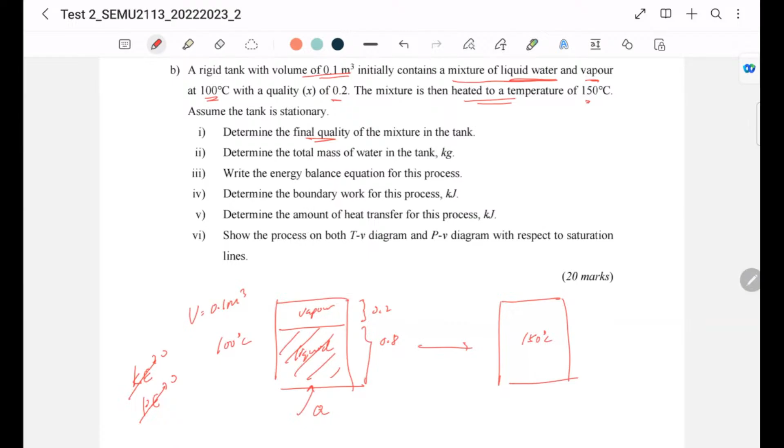So then the question wants us to determine the final quality of the mixture in the tank. Okay. So in order to solve this question here, first of all, from here we can find out the specific volume first, because it's a mix of vapor and liquid. So this we can calculate based on vf plus x vfg.

Okay, so then we know the specific volume in state number 1 and in state number 2. The reason being is because it's a constant volume. It's a solid tank. So therefore, v1 equals v2, specific volume. Okay, so once we calculate this, we know this. Then it's a matter of, at 150 degrees Celsius, how much is this?

Okay, if this is larger than v2, then we're talking about a mixture, right? Because on the T-v diagram, this is vg, okay? If our v2 is smaller, that means a mixture. If it's larger, that means it's a superheated vapor.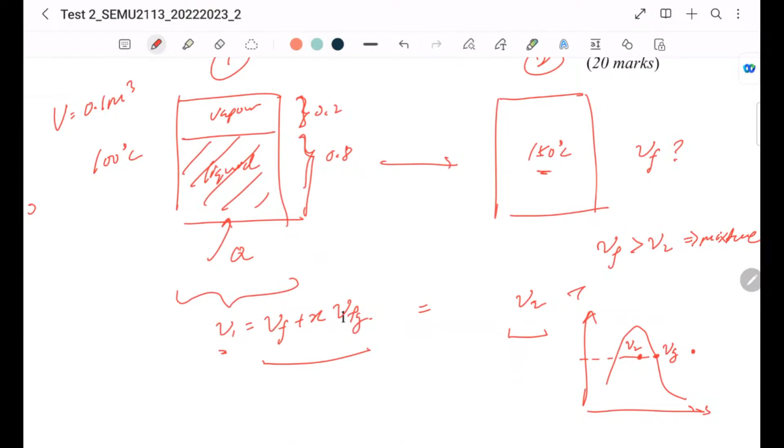And in this case, I think if you find the answer, you should get that v2 is smaller. So therefore it's a mixture. Okay. And then from there, you can find this, you can find this, and then you'll be able to find out x2. So then you know the quality of the mixture. Because in fact, the question asks you to find out the final quality. So if you solved it correctly, it should be a mixture.

Okay. And then the total mass of water in the tank. So we have this, we have this. So V is basically equal to mass multiplied with v1. So then we should be able to find out the mass.

Okay. And then write the energy balance equation. So the energy balance equation: Q in minus Q out plus work in minus work out, E in minus E out, that will be equal to delta U plus kinetic energy plus potential energy. Okay, we always write the full equation first. So this will be 0. No mass exchange because this is a closed system. Okay.

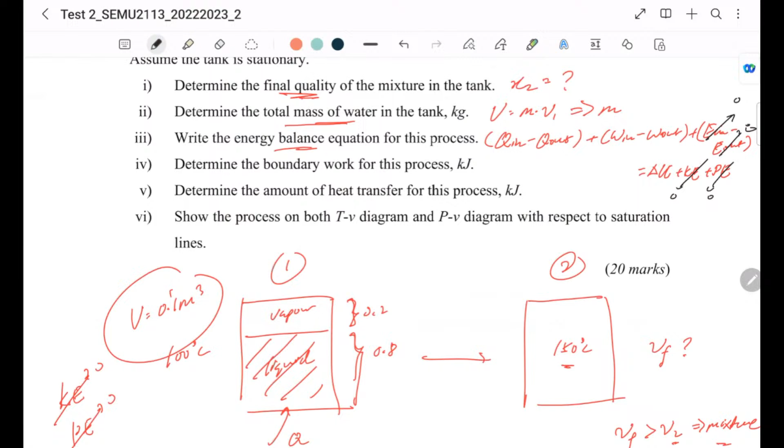No Q out. There is Q in. No work out. There's no work out because, first of all, there's no work going out. There's no boundary work as well. If there's boundary work, it's considered as work out. Okay. So then you get your equation: this equal to this. And delta U is basically equal to m multiplied with the change in internal energy between 1 and 2. Okay.

And then here, determine the boundary work. Because the boundary is fixed, boundary work is basically equal to 0. Sometimes the question is a mix between theoretical knowledge and calculation. Not everything needs to be calculated. Because of constant volume, boundary work here is basically 0. The question is just testing your understanding.

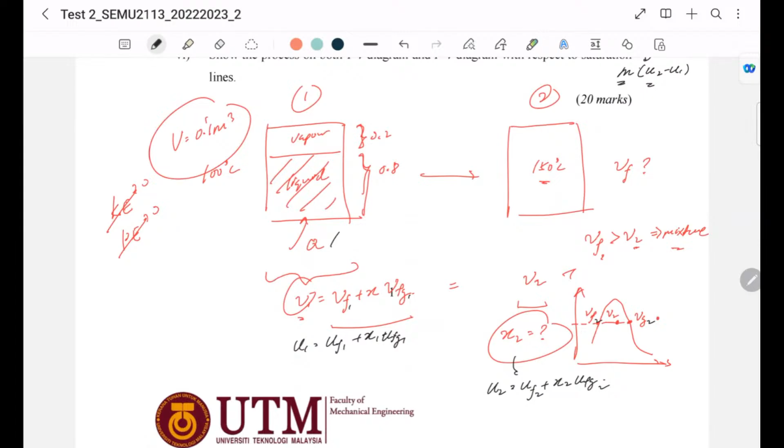Okay, and then determine the amount of heat transfer in the process, which is this one. So here we know m, we already found it here. u2 we can find out, it's not a problem. Once we have this, u2 is basically uf2 plus x2 ufg2. u1 is also uf1 plus x1 ufg1. Okay, so then you should be able to find out the amount of heat transfer here as well.

Okay, and then show the process on Tv and Pv diagrams with respect to saturation lines. Tv diagram. What happened is the volume is constant, specific volume is the same. So this is number 2. Number 1 is from here, because volume is constant. So it was changing from this state where the temperature is 100 degrees Celsius to 150 degrees Celsius. So obviously in this case, pressure is not constant: P1, P2. But the state is really from 1 to 2. So it is the purple line. Okay.

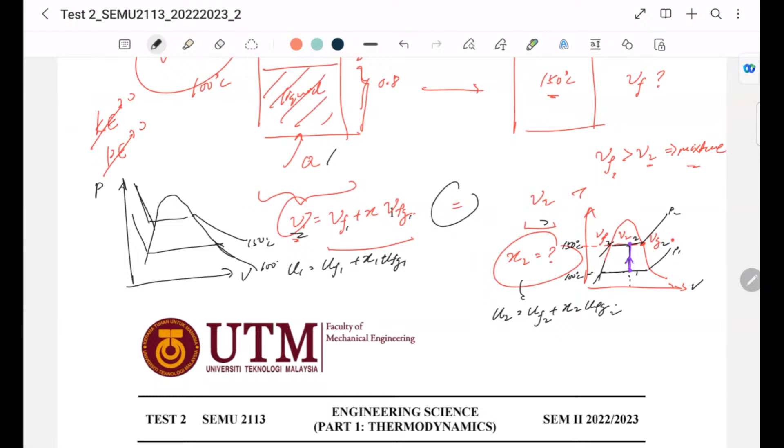If we are talking about the Pv diagram, constant temperature lines, 150, 100, it's still changing from here to here, because here v1 equals v2. So really both are a straight line going up, because it's constant volume, it's a rigid tank. So what we're dealing with here is a constant volume problem, and here is a moving boundary problem. Okay. So far, okay? With this past year question.

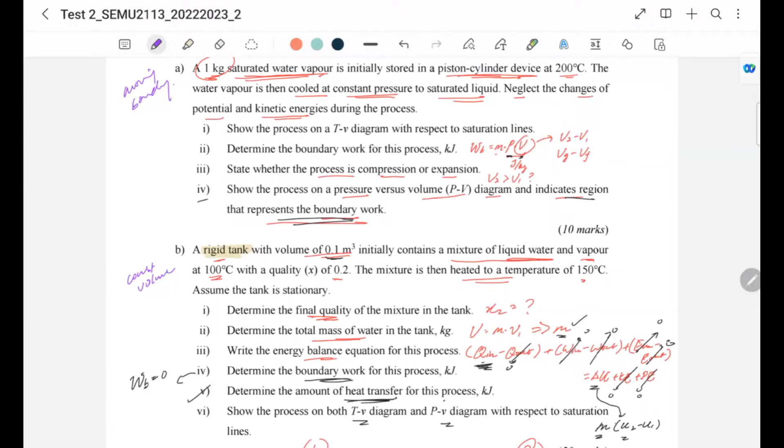Okay. So I think the question is more or less similar with the example as well. Okay. So give it a try later on after this, before Tuesday, obviously. Okay. So next, it's already 11, so I'm going to take a bit more time just to finish going through question number 2 here.

Okay. So question number 2 will be on the open system. Here the question is slightly different. Part A and B are more theoretical, and then C is the calculation. So let's go one by one. Consider an open system with one inlet and one outlet. State whether the mass content of the system increases, decreases, or is constant for the following cases. So which means we have a

okay. We have a mass in, we have a mass out. And the question wants us to determine dm control volume over dt, whether it's increase, decrease, or constant. So incoming mass flow is higher than outgoing, so that obviously is increase. Incoming mass flow is lower than outgoing, that obviously is decrease. If they're the same, it will be constant. So it's really just testing your understanding of the mass balance here. Okay.

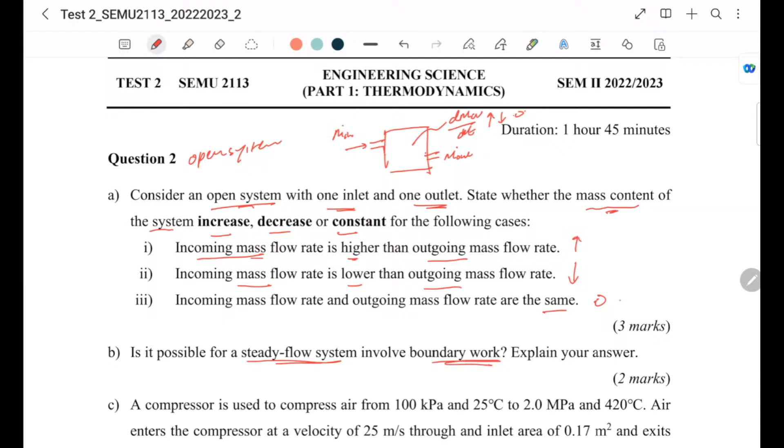Part B, is it possible for a steady flow system to involve boundary work? And the answer for that is not possible, because for the steady flow system, it basically means that volume cannot change as well. Volume is constant. Because boundary work is basically pressure multiplied with volume, multiplied with the mass, of course. Sorry, not m dot.

But if volume is constant, which means there cannot be a boundary work. The boundary is not moving, it's not doing work at all. So that's the answer for part B. If the boundary is moving, then yes, there can be a boundary work. Okay.

And then the last part here. So this here is a compressor, operating with air, which means this question is ideal gas. It's a compressor, which means there's a work exchange, there's work into the compressor. It's used to compress air from 100 kilopascal, 25 degrees Celsius, to 2 megapascal, 420 degrees Celsius. The air enters the compressor at this velocity, through an inlet area of this, and exits through an area of this.

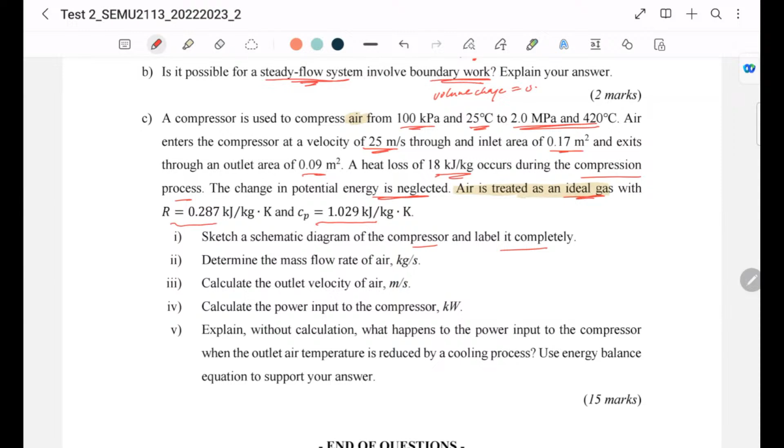So then the question wants us to sketch the schematic diagram of the compressor and label it completely. So it's a compressor, we draw the compressor that looks like this. Flow goes in here, out from here. This is state number 1, state number 2. So inlet pressure 100 kilopascal.

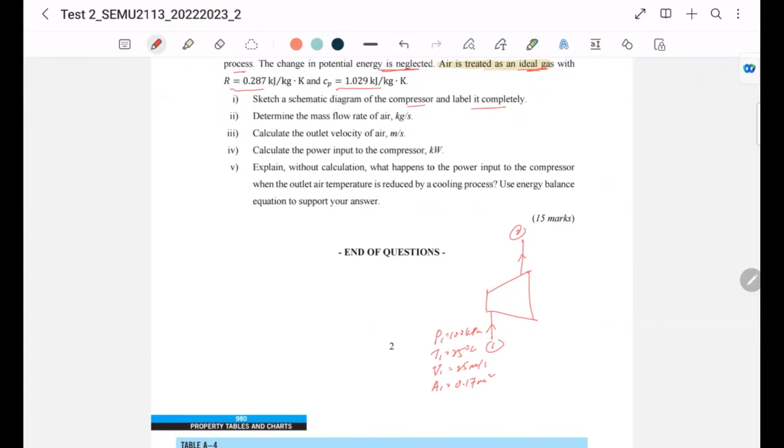And velocity. Oh, sorry. It's a very bad habit to write it in a small v. It should be the straight serif V. 25 meters per second. Area 0.17. Okay, so this is the inlet state.

The outlet state, P2 2.0 megapascal, T2 420 degrees Celsius, A2 is 0.09 meter square. And there's a heat loss, don't forget. So q out, because it's per kg, I write it in a small q, 18 kilojoule per kg. And this is a compressor, so there must be a work in.

There must be. And our control boundary is basically here. So there's a mass exchange, a heat exchange, and a work exchange as well. So that's the answer for part 1 here. Always draw the schematic diagram and label everything, so then it's very clear. Otherwise, it's just a long paragraph, right? So draw it out. It's much easier to visualize it.

And then the question wants us to determine the mass flow rate of the air. Seeing from here, the inlet condition, state 1, is definitely more complete. So we can calculate the mass flow rate based on rho A V, V is the velocity. Density is P over RT, because this is ideal gas. A1, we have it. V1, we have it as well. So then we should be able to calculate the mass flow rate, no problem. And then the outlet velocity.

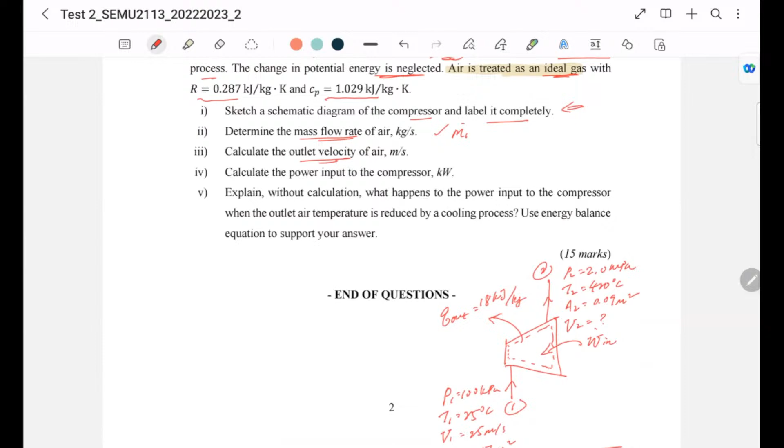Okay, so for the outlet velocity, of course, M1 equals M2, conservation of mass. So M2 will be rho2 A2 V2. We have pressure, we have temperature, which means rho2 is P2 over RT2. A2, we also have it. So we should be able to find out V2. This is a known value, okay? Because we have pressure and temperature, we know the density at the outlet. So this shouldn't be a problem at all.

Okay. Then the power input to the compressor. For this, of course, we have to write the energy balance. Okay, so Q in, sorry, not plus, minus Q out, this equals 0 because there's no change in the internal energy, kinetic energy, or potential energy of the system, right? So equal to 0. From here, let's cross out what isn't applicable. There's a Q out, there's no Q in. There is a work in, there's no work out.

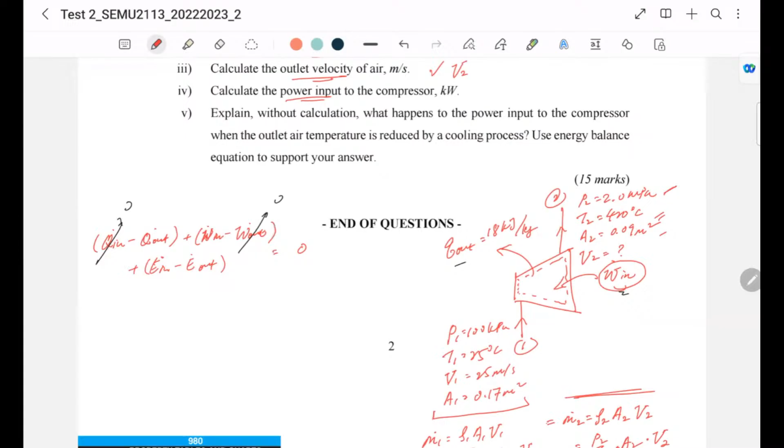Okay, so let's rearrange it slightly. For us to find W in, it's basically Q out plus E out minus E in. And Q out is basically m dot q out. So this one is no problem. Plus m dot h, I'll write it as theta first. By the way, the in is 1 and this is 2, but we know the mass flow rates are the same, so we can just write it as one m dot.

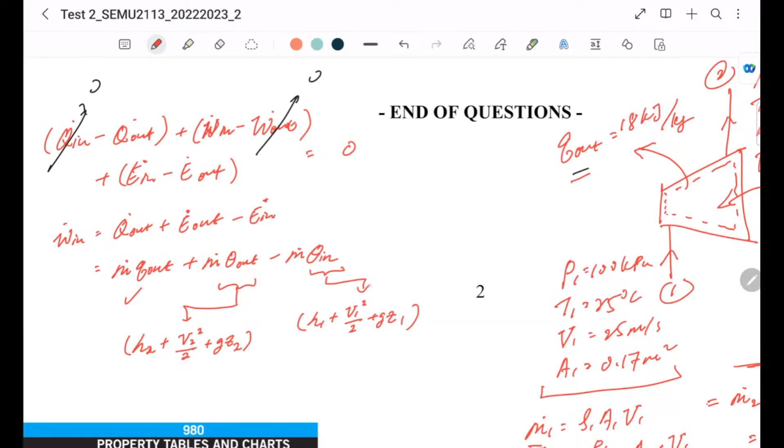And this here is really, since this is out, h2 plus V2 squared over 2 plus gz2. And here, h1 plus V1 squared over 2 plus gz1. So from there, you should be able to find the work in. The question wants us to ignore the potential energy, so even though I wrote the full equation, this should be 0. For enthalpy, we can use Cp T1 and Cp T2. Velocity, we have it. So it shouldn't be a problem to find this.

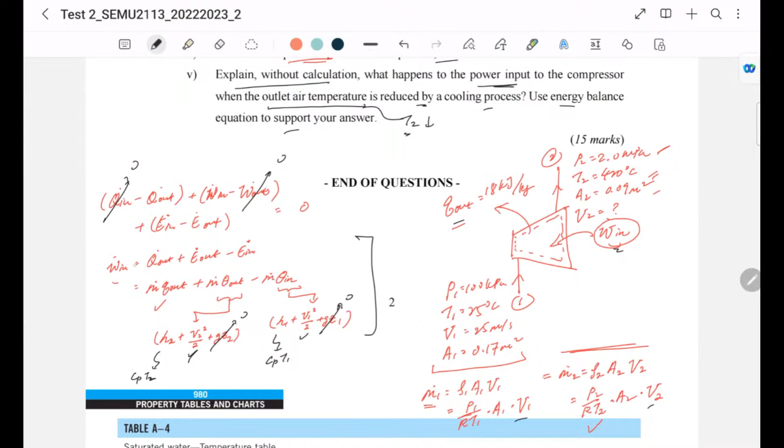And the last one: explain without calculation what will happen to the power input of the compressor if the outlet air temperature, T2, is reduced by cooling. If T2 drops, what will happen? Use the energy balance equation to support it, which means this equation. What will happen to the work input if T2 decreases? For this, I'll let you find out. Once you're able to write this equation out, it shouldn't be a problem to answer. So that's one example of a past year question.

Compared to your test one, this definitely involves much more calculation. So it's definitely a good idea that you try the examples in the lecture notes again, and practice. That's the only advice I can give. Once you practice a few examples, you might find the steps are more or less the same, because the questions don't change so much, to be honest, for thermodynamics problems.